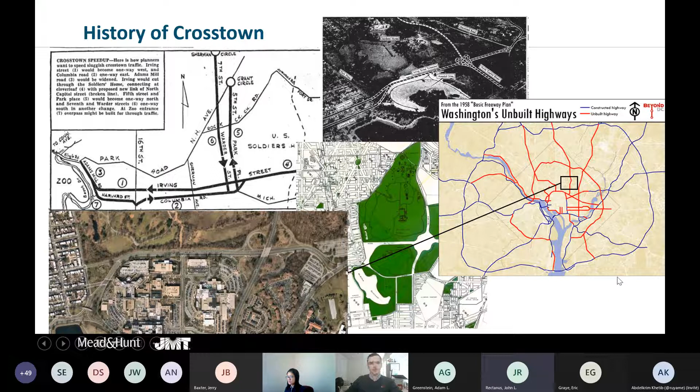So essentially you have this urban freeway dividing neighborhoods, separating people from services and from other people. And so this project basically seeks to address that by making it more of a multimodal corridor, safer for everyone, and to improve mobility in that area.

So to that end, DDOT and I believe RK&K did the 2016 Crosstown Multimodal Study, which basically identified some concepts for how can we put a cycle track on this existing urban freeway, and how can we make that safe and make it work for everyone. And so from that study came a 30% design, and that's where we took over from.

And I really just want to talk to you about a few specific areas of interest that kind of gave us a challenge in the design and that I think are kind of interesting here. And so first I want to start, well, sorry, I didn't realize I had a click there, but you can see apparently this was actually part of the bike plan in 1974. And so here we are in 2022. It was built about a year and a half ago. So it takes some time, but things are accelerating nowadays.

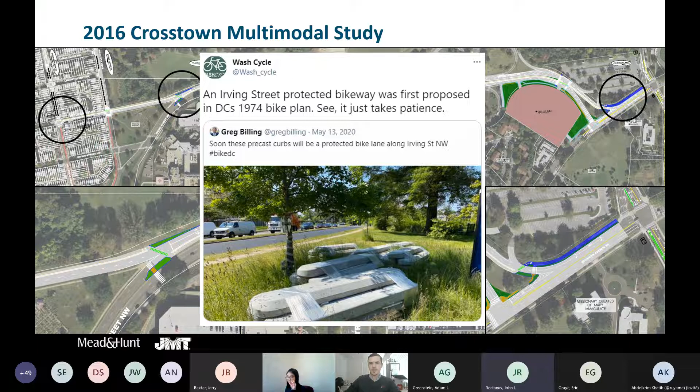So the first design challenge that I wanted to talk about is on the west end, which essentially today is the terminus of this cycle track at Warder Street and Kenyon Street. There are plans to eventually extend this further west through to 14th Street and beyond, but today this is where the cycle track ends, and that's where our design ends, and it will tie into the Warder Street cycle track, which will run northbound here.

And so the challenge was, because of this somewhat abrupt termination of the cycle track, in the original concept it was running along the north side, which was fine through here. The parking would be restricted and moved to the south side, and the south side parking would become peak restricted parking. However, on the receiving side, it would be the opposite. So the parking on the north would be peak restricted, parking on the south would be full time.

So we identified this problem, worked with DDOT, and kind of came to the conclusion that we needed to actually flip the cycle track to the south side so that the cycle track aligned with the full-time parking on the receiving side, and then the peak parking would be removed during the AM on both sides and the PM on both sides. So we would have lane continuity essentially.

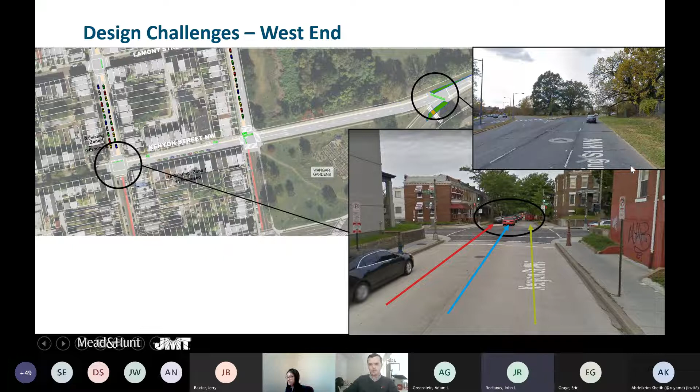So here's basically how the design turned out. And you can see again that the cycle track moved to the south side. And so we restricted a little bit of parking full time to allow the bikes to merge back into the traffic. But then during the peaks, we would have 2 full travel lanes. And again, as I mentioned, now we have a very, very short 2-way cycle track crossing across this new signal. And so the signal really only had to stop traffic crossing here and here, because we added this as a new signalized crosswalk. But the heavy through traffic going westbound here remained free flow.

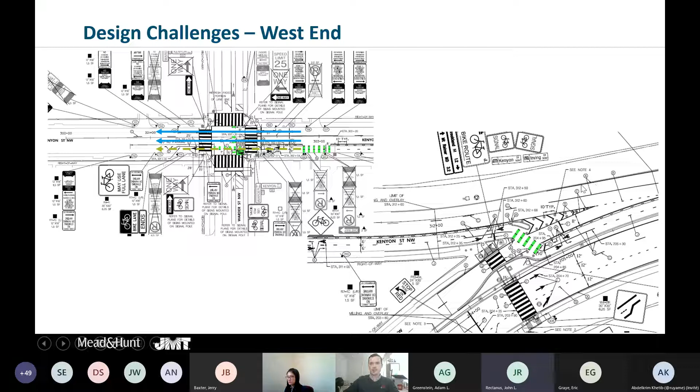So here's kind of how that turned out. And this is the short crossing signal that I was just pointing out. And then this is where the cycle track runs along the south side once it comes to Kenyon Street. So that's the finished product.

So the second design challenge that came up was at the intersection of First Street, which is the entrance to the hospital. And we have an extremely heavy left turn in the morning that goes into the hospital. The staff and everything comes in the morning via this route from the north and from the south. And so it had to stay a double left in order for this intersection to work. And what you can see is that on this approach, we have 2 through lanes and a right turn lane. And so basically, in order to keep 2 through lanes in both directions, a double left, add a 2-way cycle track and a buffer, the entire lane had to shift.

And the issue was that these drainage structures along this double left turn lane would have to be relocated. And that basically wasn't in the construction budget. As Jerry mentioned, these are kind of quick build projects, not trying to do a lot of civil design or drainage work, because that really pushes the costs up beyond what this contract can sustain.

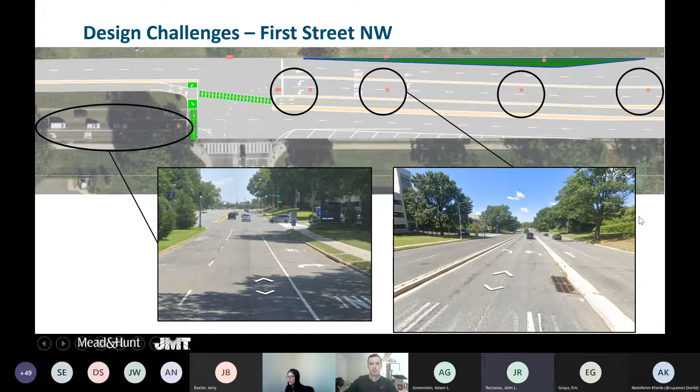So we went back and analyzed this and looked at the ways that we could adjust it, and it turned out that we could get away with converting this eastbound approach from 3 lanes, which it was in the previous condition, 2 throughs and a right, to a single through and a shared through right.

And that allowed us to push the cycle track to the south of the existing median and not have to touch any of those drainage structures. And essentially, that eliminates any issue we might have with the through traffic shifting and any conflicts that would create with the cycle track. And so you can see we had to do a little bit of median work here to put a signal pole out there. But other than that, we didn't have to touch any of these medians or drainage structures.

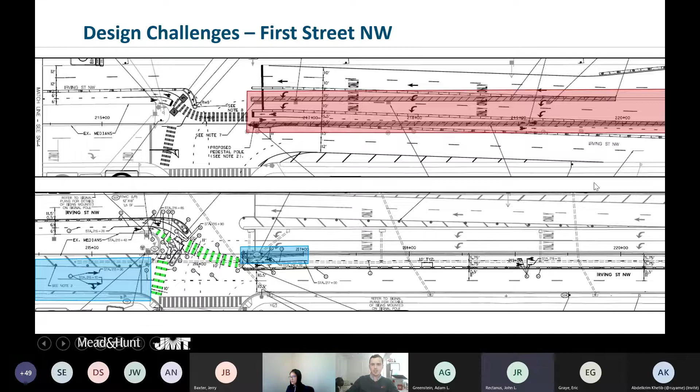And so you can see here, this is the intersection. That's the crossing for the bikes, and this is the existing median right there. So the cycle track just sits below that.

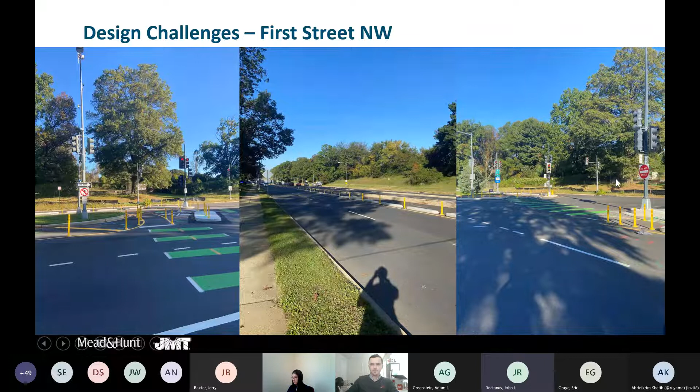So the next challenge that came up during the design was on the very east end, the eastern terminus of the cycle track, where the cycle track moves from an on-road facility to a shared use path facility. And originally during the design, this was just going to be a standard asphalt shared use path, but we very quickly realized that that would require us to impact these trees. We didn't want to have to dig down and impact the roots, and we also got similar feedback from DOEE and the Urban Forestry Division.

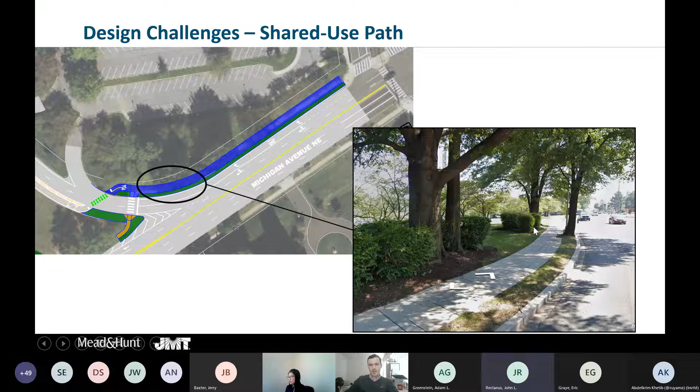And so what we ended up doing was a porous, permeable, flexible pavement path, which basically sits on top of the existing grade and made it so that we didn't have to impact the tree roots. And as you can kind of see here, it also meanders through the trees, so we didn't have to damage their roots or cut any of the bushes back. Because this path was widened, we ended up doing specific path lighting for this trail.

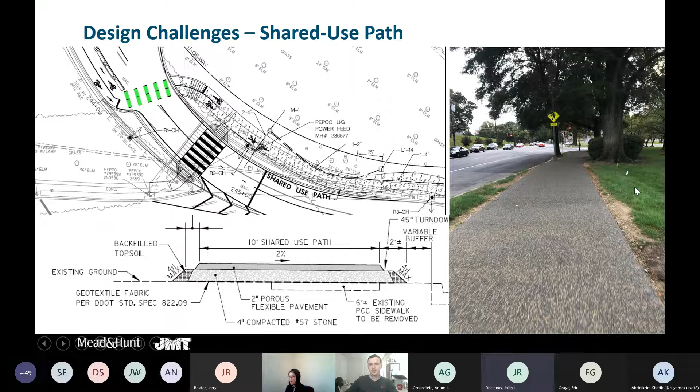So the next thing that I wanted to talk about was the repaving effort that happened kind of right in the middle of the project. So you can see before we came through, the pavement in most of this corridor was in pretty poor condition. And it turned out that if we did the repaving as part of this specific construction project, it would basically double the budget. And so DDOT worked with its existing repaving contracts and found out that this one was pretty much due on the schedule around the same time frame that the cycle track was going to come through.

And so what we ended up doing was developing an interim plan, because they needed to do the repaving a few months before we could actually start installing the cycle track facility. And so the interim signing and marking plan basically made it so that we could maintain the existing vehicle traffic operations, and then very simply come back when we were ready to start building the cycle track and place our blocks right along the third travel lane here. You can see these white dots and this white line, which was the travel lane during the interim condition, became the concrete cycle track buffer blocks.

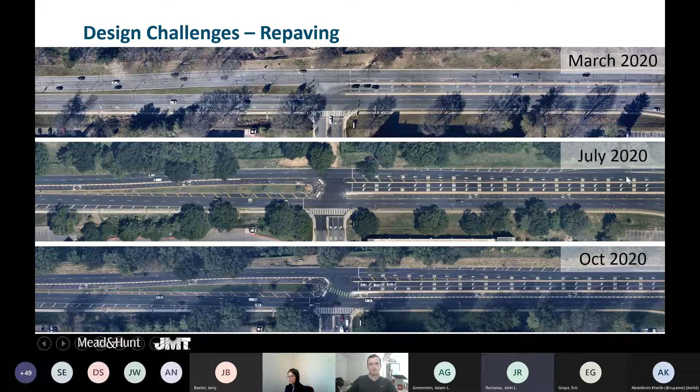But ultimately, all they had to do then is come in and stripe the yellow edge line and put the blocks down, and that allowed them to seamlessly transition from the temporary condition to the ultimate condition. And so that actually made this project possible from a cost perspective by getting the repaving done through their normal channels and coordinating that with our design. And so you can see here a few more examples of how that worked out with that yellow edge line, and then they were just able to again place those blocks right along that yellow edge line and install the flex posts and all that stuff.

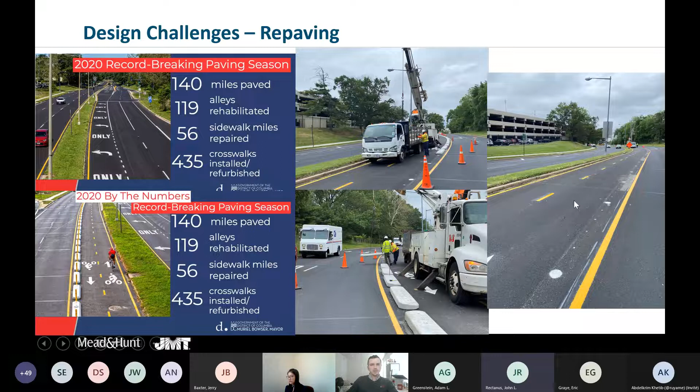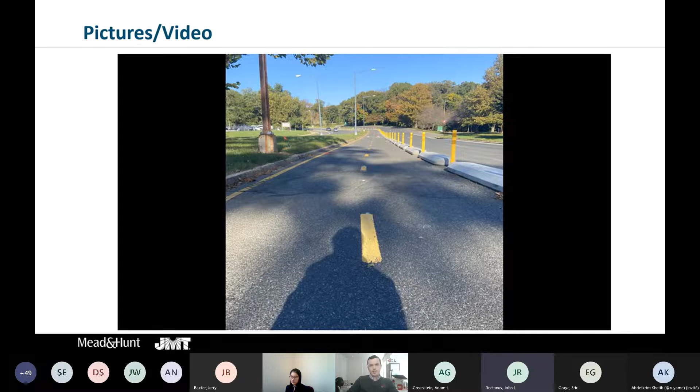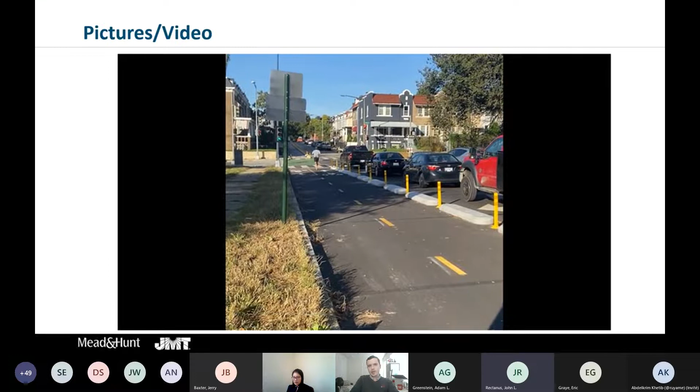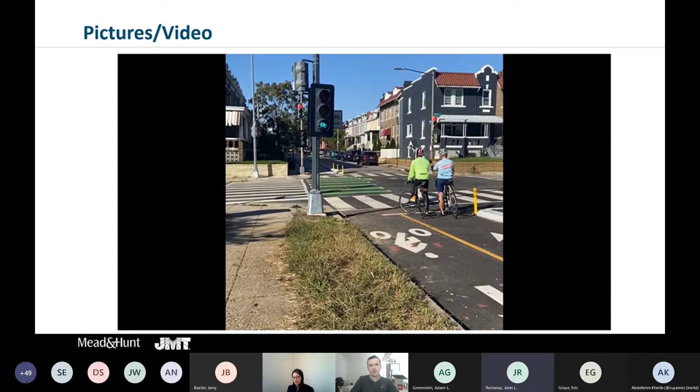So hopefully this works. This is some pictures and videos of the facility in action. Yeah, and you can see basically how people are able to very safely ride along with adjacent vehicles, but there's no conflicts. Each of these signalized intersections has bicycle signals, so all the bike phases are exclusive. No turning conflicts or anything like that. And we noticed also that because this area has very narrow sidewalks, people started using it for running and other mobility uses.

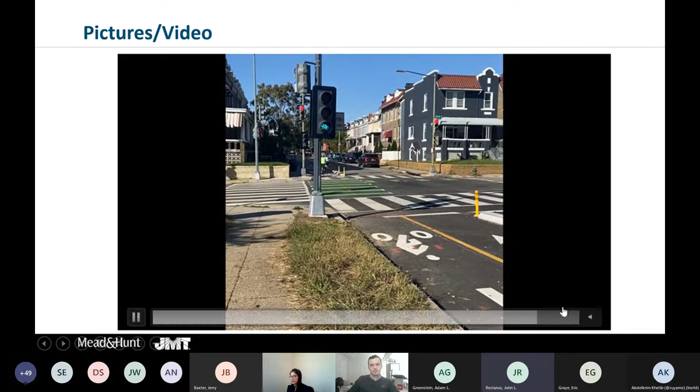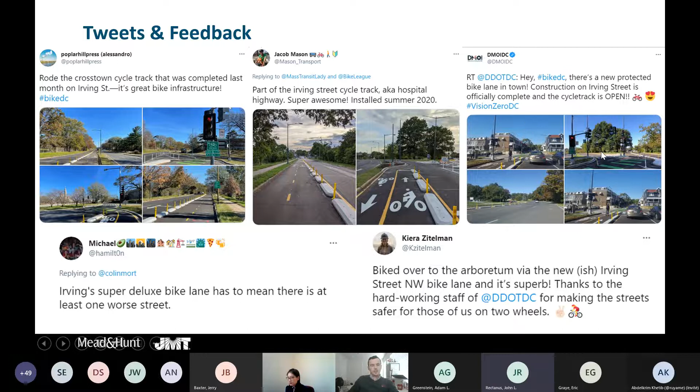So lastly, I just wanted to show some of the feedback that we got, and everyone that has been involved in this project from the study through to construction should be really proud of it. I think there's been a lot of great feedback, and I think it's really a great model for how to repurpose existing pavement into something that is more appropriate for our current context and our current mobility needs.

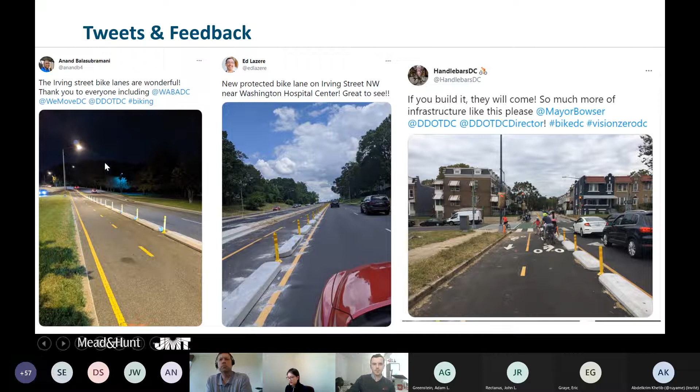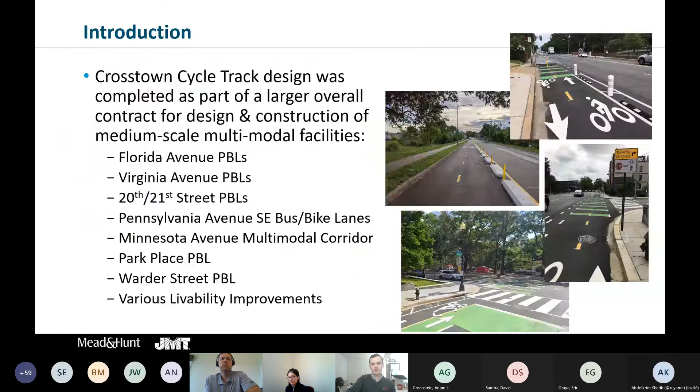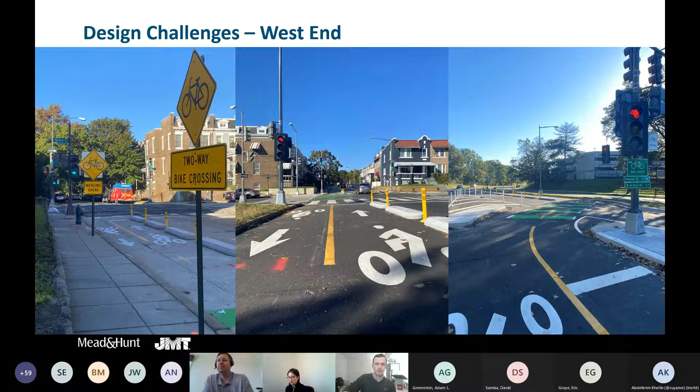Yeah, I know which one you're referring to. That was an installation mistake, I believe, that needs to be corrected. Where was that? There's one there too. In both pictures, the bicycle's doing something of a wheelie, which is not correct. The bicycle should be flat. So that's just an installation error. So the signal modifications, there were 5 traffic signal modifications.

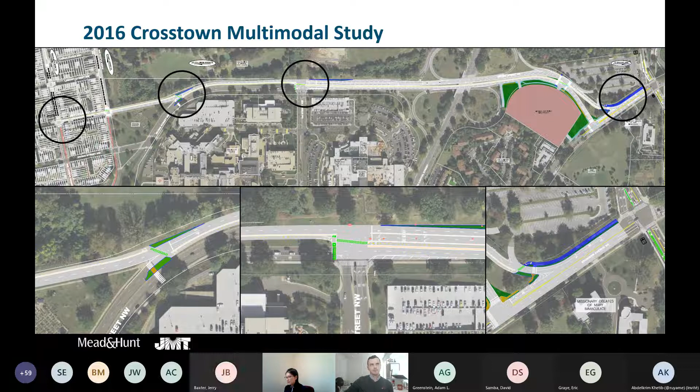I would like to introduce Dave Samba. He is a transportation engineer and community planner with 11 years of professional experience. Dave's a double graduate from the University of Virginia and another university. I'm sorry, I think my bio missed some words here. And he currently leads mobility, safety, and parking projects at Kimley-Horn.

Dave's comprehensive skill set includes traffic operations, multimodal transportation planning and design, benefit cost analysis, and grant writing, private sector traffic studies, private and public parking evaluations, and complete street evaluations. Dave is passionate about creating safe, accessible, and equitable mobility choices for all. Dave will be presenting the Core of Rosslyn transportation study and the implementation plan. Dave, it's your time now.

Dave, you are muted. Thank you for that introduction. I'm going to get my presentation going, and I'll share my screen as well. Let's see. All right, can you confirm you're seeing the presentation? I think it's coming through. Yeah, I can see it. Great, perfect. All right, well, good afternoon.

Thank you all for the opportunity to present the Core of Rosslyn transportation study. Lily, thank you for that introduction. So I am David Samba. I'm a mobility engineer and community planner at Kimley-Horn. I'm in our Reston, Virginia office. And I was part of this project, which was really delivered in partnership with Arlington County. So on that point, I would be remiss if I did not name a few members of the county project team who led this initiative through a really excellent planning and public engagement process. So Dan Neighbors, Christine Baker, Kelly Cornell, among many others that were involved.

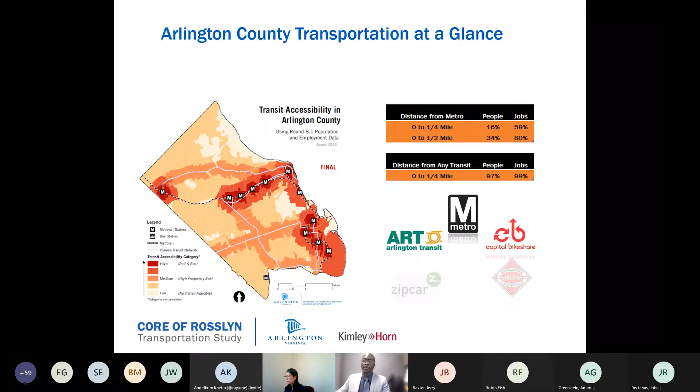Certainly there are a number of multimodal options to get to the county. Metrorail, 11 Metrorail stations, local bus service, 17 ART bus routes, I believe. Capital Bikeshare, Zipcar, rail, VRE, many options. And of course, what we always want to make sure we pay attention to is those active transportation modes that are at most risk. So that's the bicycle and pedestrians. So how do we manage all these interactions? I think that was a major part of this study. Some other context on Arlington County, the county has 5,700 on-street parking spaces and over 100,000 off-street parking spaces, and the majority of those are privately managed or maintained.

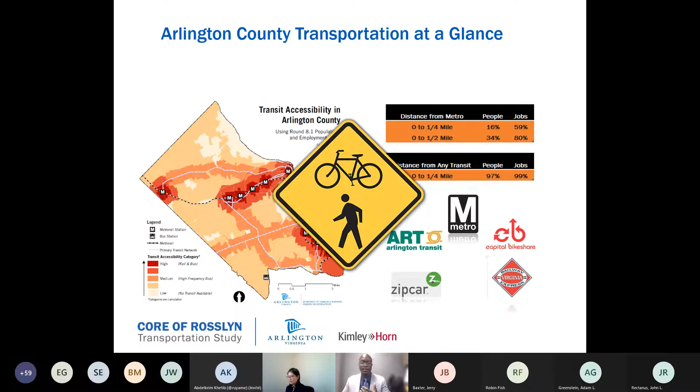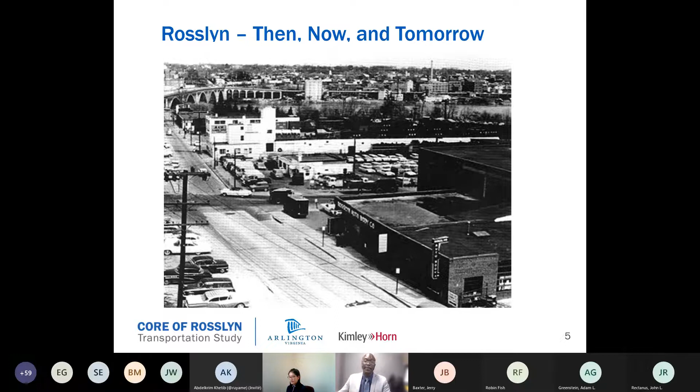So drilling down to Rosslyn, then and now, I'll show you a little bit of some imagery of Rosslyn past as we get to Rosslyn present. So Rosslyn today is home to a dynamic and interconnected urban transportation system. It offers those who live and work and play in the neighborhoods really a wide range of choices for how they travel and where they can go through a diverse range of transportation modes. This older image may not lead you to think it is a walkable neighborhood, and it actually has the highest foot traffic volumes in all of Arlington County.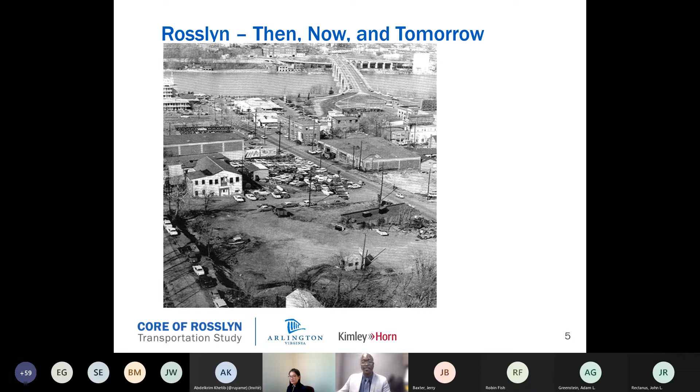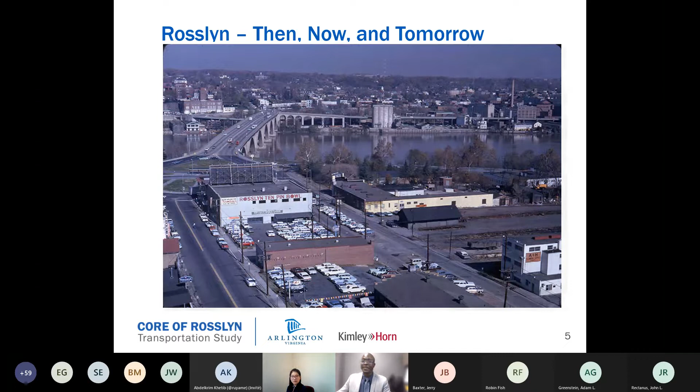So as we continue to move through, this is an image from the 1960s. Development is starting to happen, obviously. Still from the 1960s, but we have a little better color cameras, and then we see Rosslyn today. So about 13,000 population, more than 25,000 people work in Rosslyn, depending on the statistics you look at.

And just to provide some context to what I just said, there are 664 metered parking spaces, so about 12% of the county's parking spaces are in Rosslyn, and about 20,000 off-street spaces. So again, 20% of the off-street spaces. So Rosslyn is interesting. It has some interesting and prominent transportation features. This is the Fort Myer Drive tunnel that's currently there. You can see a sky bridge, I believe, in the background there.

And it is on the nexus of a future transportation change as we are grappling with and come to terms with that people are changing the way they want to travel, right? It's more about that human scale, pedestrian scale experience as opposed to this auto-centric experience that Rosslyn was built to satisfy. So how do we incorporate that into our study?

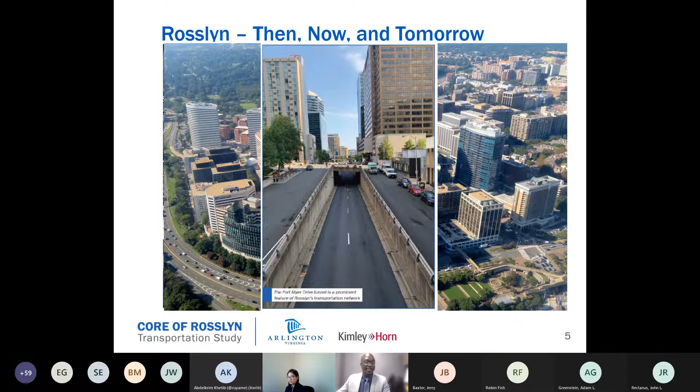All right, I'll just give you a little more context. I really like these images just to give you context for how active Rosslyn is, looking through parking meter performance. So this is 10 a.m., 12 p.m., so lunchtime. Red means there's more parking activity, at 7 p.m. So Rosslyn is pretty busy. People are there to enjoy themselves, to work, to live. And so planning this community, and planning it well to make sure it's functional for all those uses, is critical.

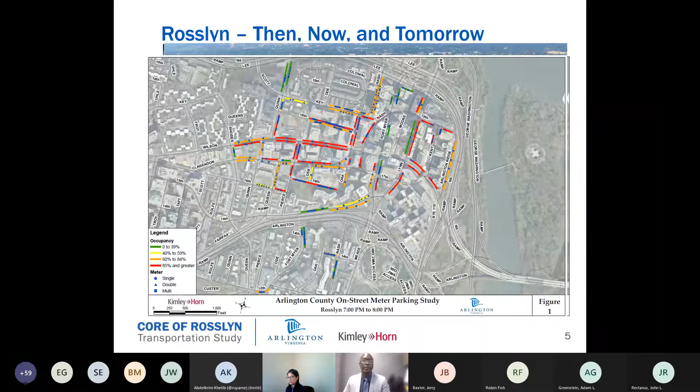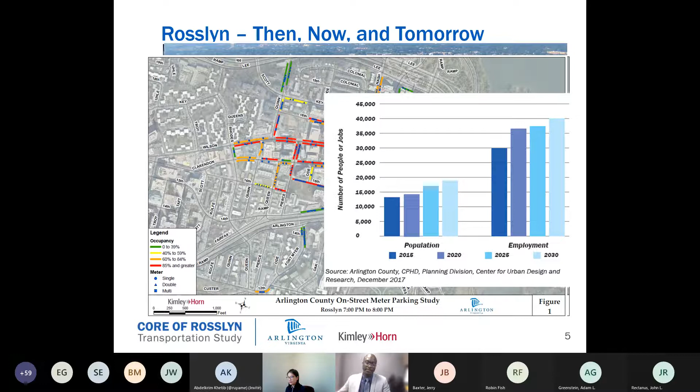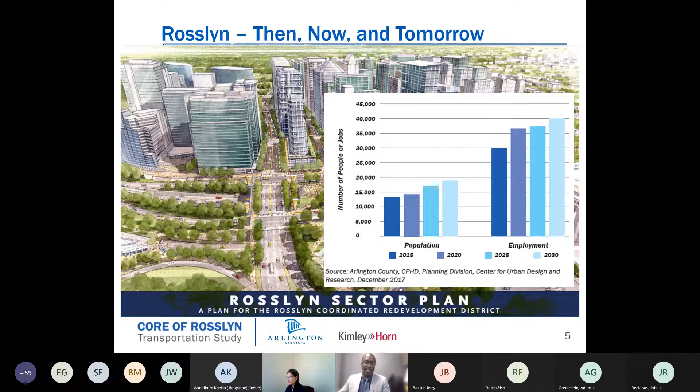That's a population statistic. So you can see how Rosslyn is projected to grow, both in population and employment. And how this all leads to, of course, the Rosslyn Sector Plan. So how do we start to envision what tomorrow will be? In 2015, the county approved the Rosslyn Sector Plan, through a process called Realize Rosslyn. It was an update to a 1992 plan. It served as a 25-year outlook to guide future public and private investment and provide recommendations for parks and transportation-related elements.

In that sector plan, they identified that Rosslyn needed a better urban design framework to become a more attractive and functional place. They also wanted a refined multimodal transportation system, and a more cohesive and functional park and open space network. You'll see what I'm talking about with parks and open space in a second. Realize Rosslyn and the Rosslyn Sector Plan was a very successful effort, but ultimately it was not a regulatory document. It presented an illustrative concept. It recommended some goals, set a vision, and established guidelines and policies.

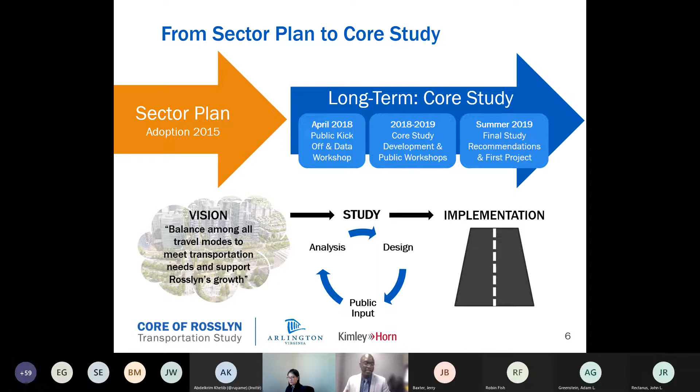But how do you get from a vision to projects and implementation? Well, you actually need to do another study, and that's what the Core of Rosslyn study was. The Core of Rosslyn Transportation and Implementation Study was an opportunity to take the great ideas of the sector plan and analyze them, design them in the public realm, share them with the public, have that idea exchange, that process of discovery, to lead to real projects that could be implemented in Rosslyn, that were vetted with the public and spoke to the current needs of today.

So I already hit on the goals of the project, but I'll just say a couple other high-level things. We were trying to evaluate multimodal design concepts and measure how each concept achieved the sector plan's goals. We were heavily interested in engaging the public and other stakeholders. And ultimately, we were trying to adopt a 2030 preferred alternative composed of individual projects that can move through the county's design process and also their CIP processes.

We were also really interested in sequencing those projects. So how do we create a fluid network transition from where we were when we started the project, in 2018, 2019, to where we want to be in 2030? And a little bit of visioning is always important. We wanted to identify projects that went beyond 2030 to continue to realize the Rosslyn Sector Plan.

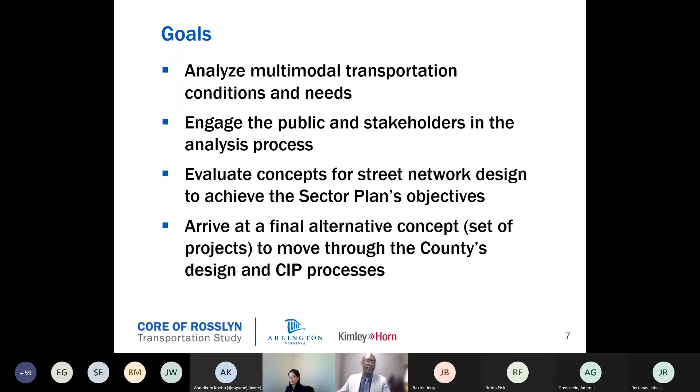All right, so just to give you a little timeline graphic. Again, the sector plan was adopted in 2015. The county started to do some short-term activities, engagement with the community in 2017, some tactical urbanism projects, and I'll highlight that and come back to that in a second. And then we kicked off in earnest the Realize Rosslyn study in 2017 to do all our analysis, to engage the public, and then to really think through what implementation will be.

And I highlight tactical urbanism because I think this was a really important and related aspect of our study, which was even though as we were analyzing all these different future alternatives for 10 years out, for 15 years out, the county recognized that it was important to speak to what people needed in Rosslyn today.

So through tactical urbanism deployments, I'm talking about a little bit of lane restriping, planters in the roadway, rethinking parking and curb space, and making it a little more pedestrian accessible and pedestrian friendly. The county was able to do some relatively low cost and quick implementation projects to, one, set the stage for some of these future changes, but then two, specifically to address needed operational and safety needs.

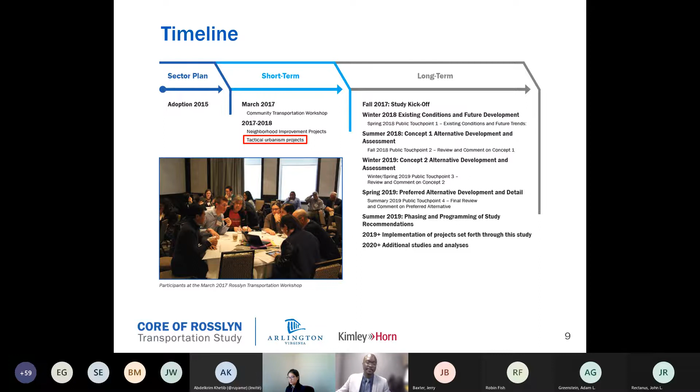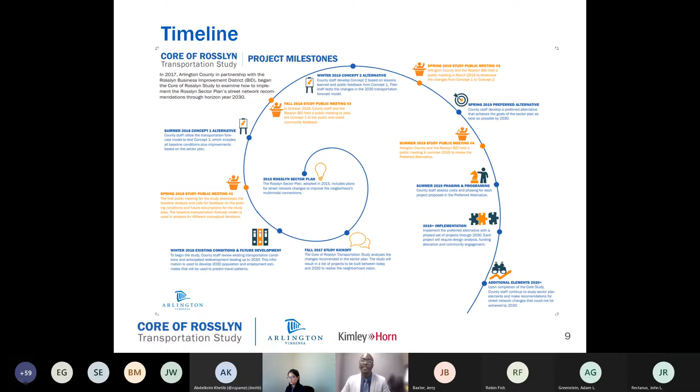And I'm a very graphic person, so here's just another timeline of that. The only thing I'll point out on this slide is that we had 4 different and very successful public engagement meetings, and really that helped to refine the process.

So what did we focus on in the Core of Rosslyn study? The first thing is that it was centered around implementation. Everything that we did was to get the county a list of projects that could be designed and implemented by around 2030. So we really tried to keep a very realistic eye on that end goal. And it was a multimodal study. We looked at how every single mode was influenced or impacted by the different design alternatives.

We always wanted to make sure it aligned with the sector plan goals, but we also tried to stretch those things in the sense of what else can we be doing to increase the accessibility of bus and rail transit? How can we change and enhance the pedestrian experience and comfort? What can we suggest that would increase the connectivity of Rosslyn's bicycle facilities to the county's larger network? These were some of the things that we were thinking of.

And even though I'm a transportation engineer and planner, we were also trying to think beyond just transportation; we were thinking about urban design. How is what we're suggesting going to incorporate elements of sustainability, green space, pervious areas? How's it going to enhance the streetscape and placemaking elements of Rosslyn as a neighborhood? These were just broader things that were embedded in our analysis.

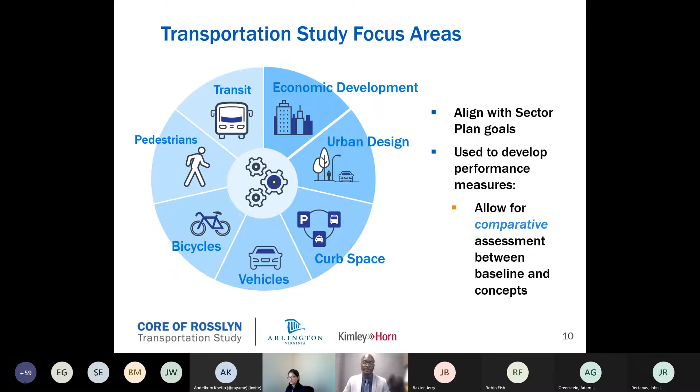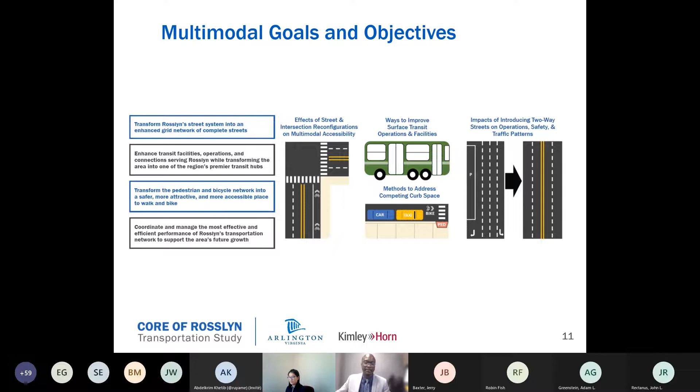So again, here's some of our goals and objectives. Again, we tried to take a very multimodal focus, wanted to understand how we're affecting all the ways people are currently traveling and how they might travel in the future if we could raise that level of service for them. So that's the background context. A little bit more about Rosslyn to kind of show what we're working with. If you know where Rosslyn's situated, some common destinations from Rosslyn, you're heading into DC or heading out west to Greater Fairfax, the Tysons Corner area. You're certainly using the Rosslyn-Ballston corridor along I-66.

Sometimes you'll meet a community and they might be resistant to changes that might lower the vehicular level of service to increase the pedestrian or the transit comfort. But this was a community that was very receptive to that as we were working through the process.

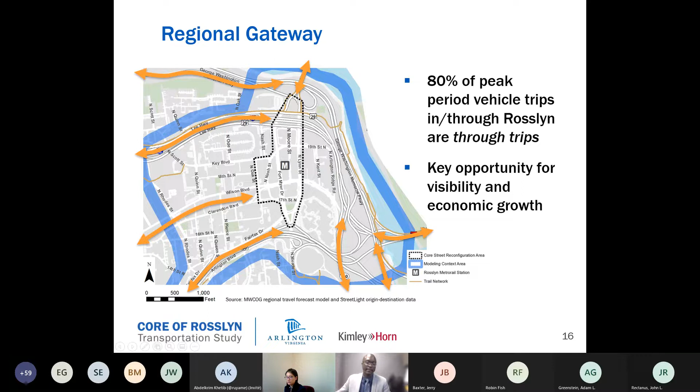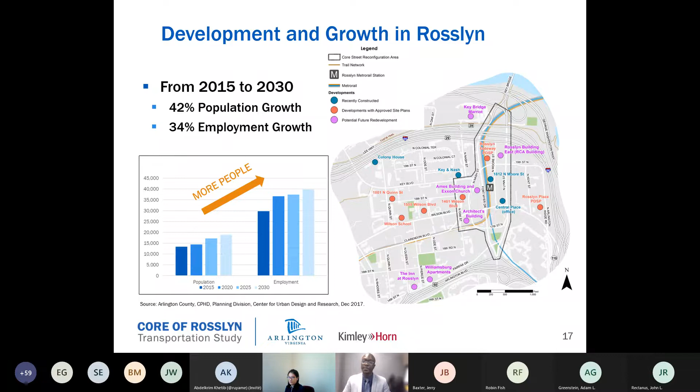And then I kind of already alluded to this earlier, just Rosslyn is poised for some significant development. And so this was a very critical point to take a step back and recognize we need to implement that vision now, sooner rather than later, so that we are prepared and ready to absorb the future population, the future employment, and really make Rosslyn a place that is active and vibrant.

All right, so again, a little more background for you. So now we can talk about the data and methodology, the nerdy stuff, I suppose. So what was our key data? How do we do this study? I mean, it's everything you would think it would be. The existing traffic counts. We used some StreetLight big data to really understand regional trips and trends. We took some previous parking data that we'd had from that meter parking study and other studies to develop a really good existing conditions understanding.

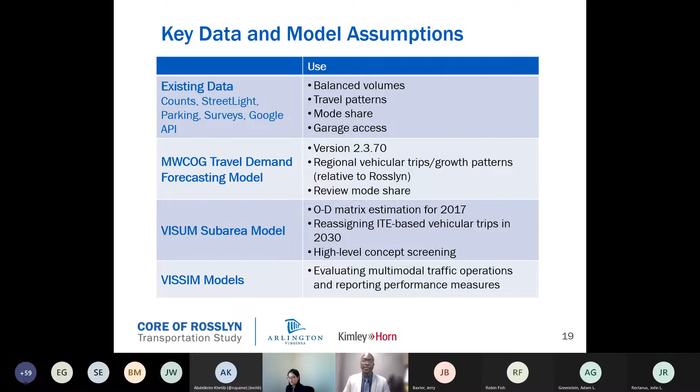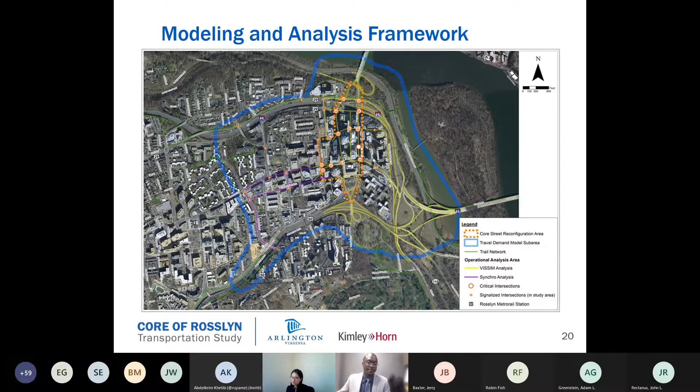In terms of some other things we did, of course, field observation, travel time runs, and then we used our typical modeling processes, the MWCOG regional model, a sub-area model, and a VISSIM model, which I'll get into in a little bit. So just to give you a sense of what our study area was, quite large. So we had in that blue line, that's the entire travel demand network that we studied. But then we kind of broke it to smaller and smaller chunks that were more bite-sized and were able to really accommodate.

So again, we had a macroscopic analysis. So that's what we use the MWCOG model for. We really want to understand at a regional level, how are trips occurring? What's the external trips into Rosslyn, the internal trips out of Rosslyn, and of course the internal to internal trips as well. So that helped us really kind of grapple with, okay, how does Rosslyn relate to the region? From there, we took a step further, and of course, when we're using the regional model, it's not as refined, it's not as detailed to the study area. So we use the VISUM model to replicate kind of sub-area travel patterns. And I'll show a figure in a second that shows that a little more clearly.

And then once we were able to really replicate that sub-area trips, we drilled down one further level into a microscopic evaluation using a VISSIM model, that's where we're going to do our detailed study area network analysis. And that's actually where we're able to have a little better understanding of how some of the changes we're recommending from a multimodal perspective are impacting vehicles and vice versa.

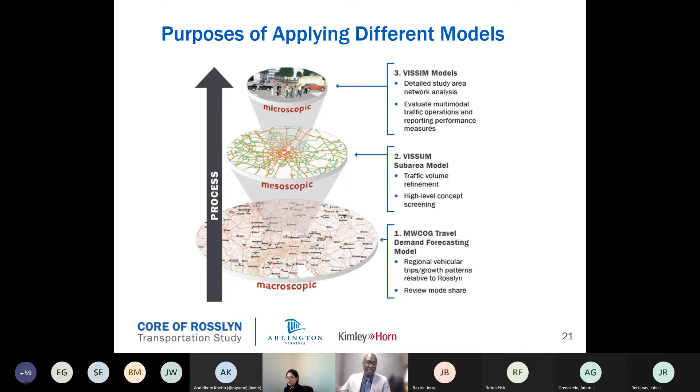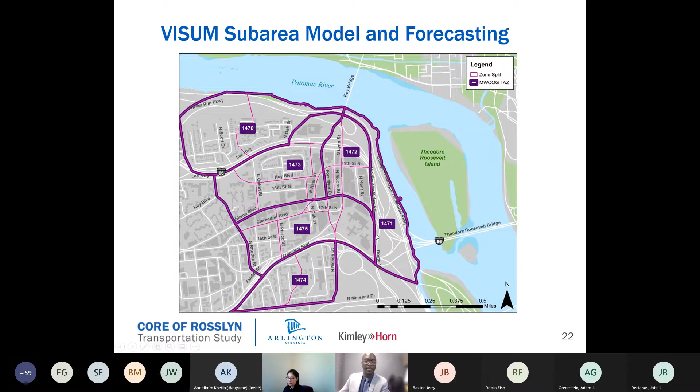So again, just to give you a sense of our study area and our forecasting. Actually, I'll go to the next slide on this one. So the purple lines are the MWCOG traffic analysis zones. The pink lines are the sub-area splits that we use for our VISUM. So again, we tried to really drill down there, so we were able to get a little bit better granularity as we were developing our modeling network.

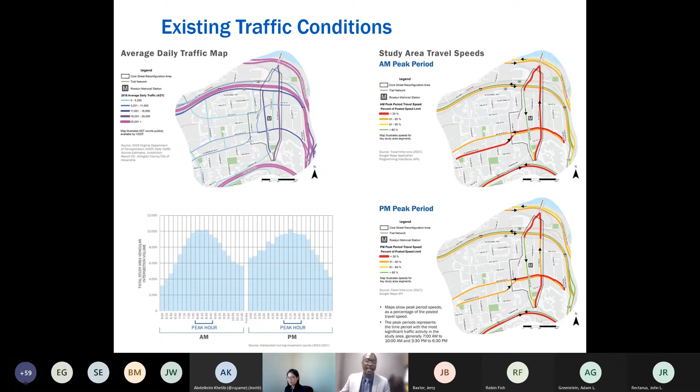All right, so did all this, we set up all this process. What was the analysis? Well, again, it's typical analysis you would think. We looked at existing traffic conditions. We mapped traffic volumes during the peak hour. We looked at level of service and delay and congestion and queuing. And really, we were trying to understand what the existing conditions were, where congestion exists, and how it propagates through the network, and where the kind of relief valves might be.

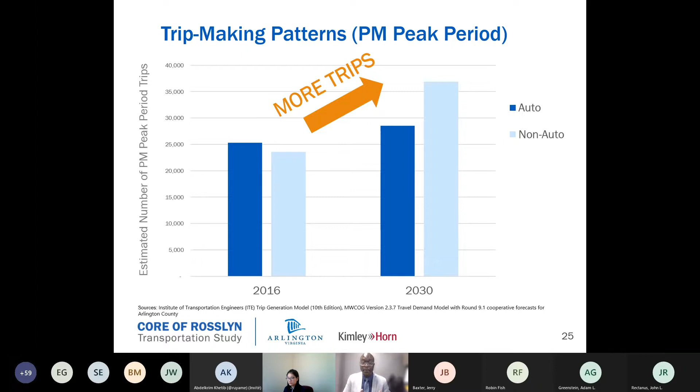We looked a little bit into the future to understand, again, using the MWCOG regional forecast and some specific land use inputs that the county provided. We wanted to understand how is trip making going to be different in the future? If we're planning for projects in 2030, how responsive would those projects be to this 1% per year growth in auto trips and that 4% per year growth in non-auto trips?

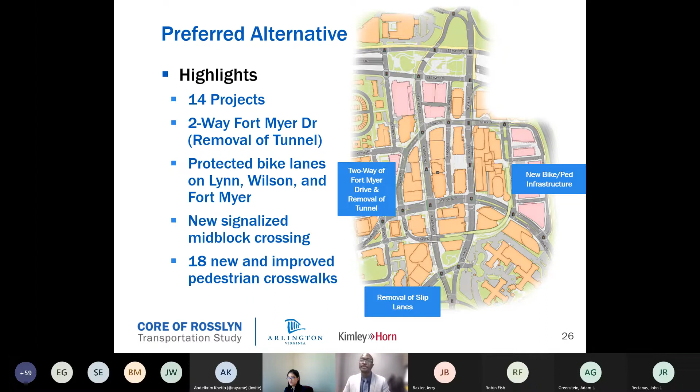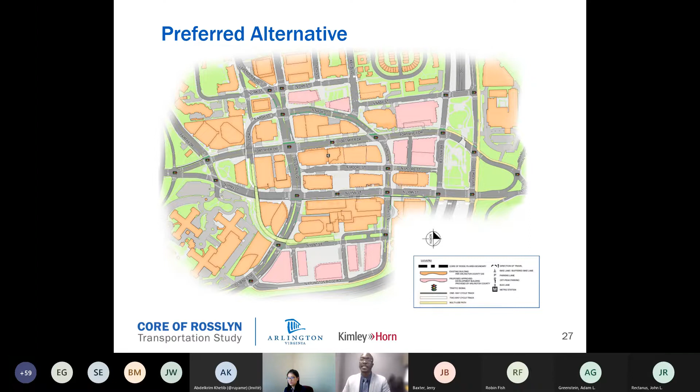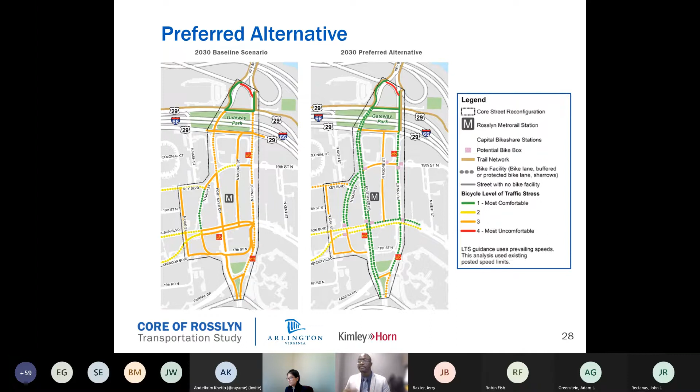Not to only focus on vehicles, I wanted to just drill down on bicycles for a second here. Looking at the baseline compared to the preferred alternative, you can't really tell from the numbers, but if you look at the increase in the amount of green shown on the right, we were able to show that there'd be value in increasing the percentage of bicycle level of traffic stress 1 streets from currently about 12% all the way up to 61%. So think about that. That is an increase of, I think it was 1.7 miles of improved connections in Rosslyn for people that are biking, and to an extent, people that are walking too.

And so we came up with this comparative assessment where we identified measures of effectiveness per mode that were specific to that mode, and used that as a benchmark of how well is this mode doing in the preferred alternative? Are we making a positive change, a negative change, or keeping it approximately the same? And that allowed us to have a more nuanced conversation with the community so they could see the value of some of the changes that we might recommend.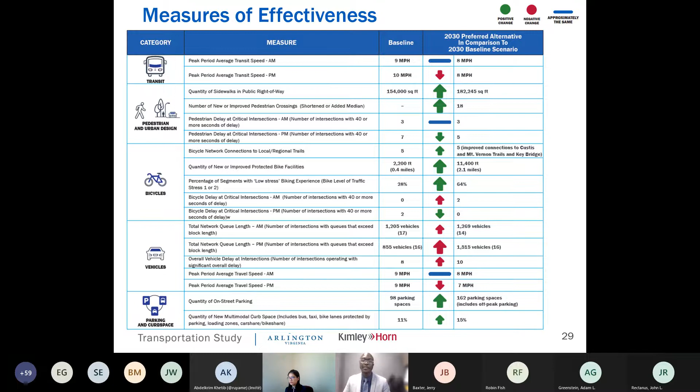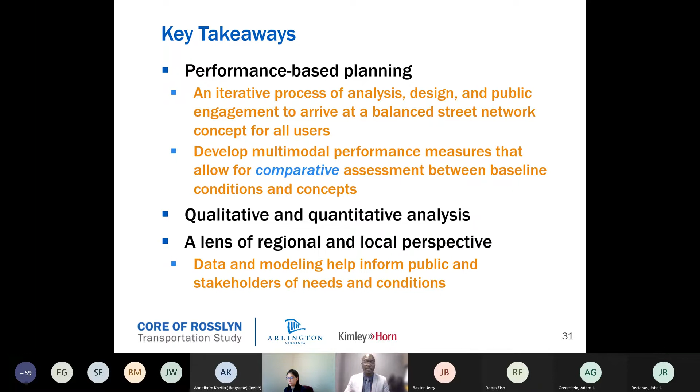All right, so key takeaways, implementation, next steps. This process was performance-based planning, right? We iterated multiple times on design concepts to come up with a balanced street network. And that comparative assessment led to a really good conversation with the community and a screening of those concepts to make sure that we were hitting not just one vision of Realize Rosslyn, but all the visions of Realize Rosslyn. And we also took a very nuanced approach to looking at how the changes affected both the region by using the MWCOG model, but also the very specific local needs using the Vissim model and also connecting with stakeholders.

On implementation, as I mentioned, we hit 14 projects. One of the things that was very important was phasing and responsibility. So we thought through, again, we want to have a fluid transition into 2030. So how do we accommodate all these different projects at the same time? How do we help the county identify what the funding mechanism will be?

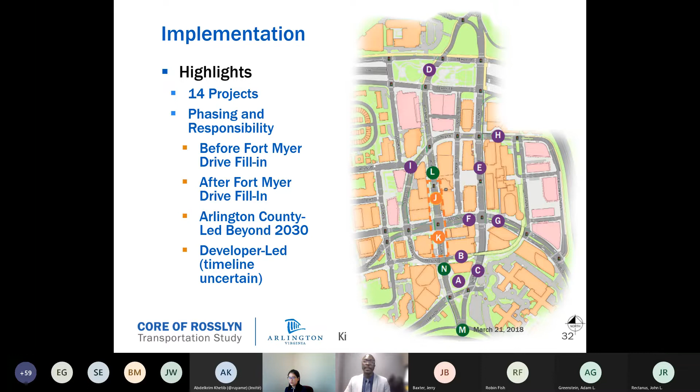So we prepared an opinion of probable costs and a sequencing of each of these. We thought through it in terms of, well, what do you do before you fill in Fort Myer Drive? So there's a certain amount of project you could do then. What do you do after you fill in Fort Myer Drive? A certain amount of project you can do there. And then that gets you to 2030. What else can the county do after 2030?

And recognizing that the Rosslyn BID was a key stakeholder, what are things that might be developer-led? They may not have a certain timeline, but they're no less important. So what are developer-led initiatives that are really going to enhance the Rosslyn grid network?

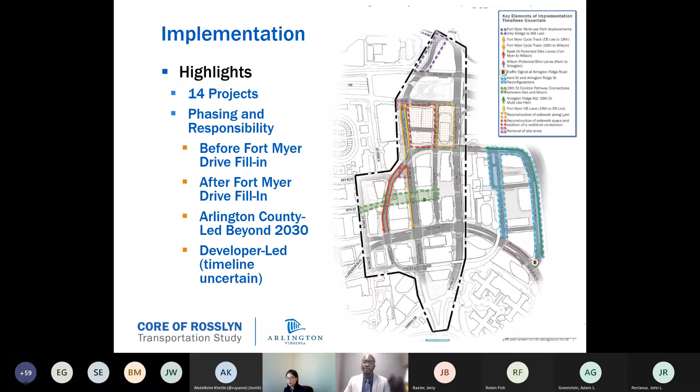And now, with my last couple minutes here, I'm just going to drill down into a couple of the implementation projects. So again, Fort Myer Drive, the tunnel conversion is a critical one, and we talked a little bit about that. Bringing this tunnel to grade and making sure that this is now a new pedestrian path across Fort Myer Drive.

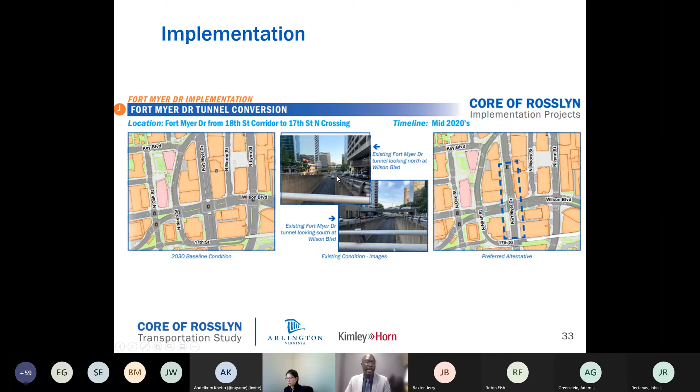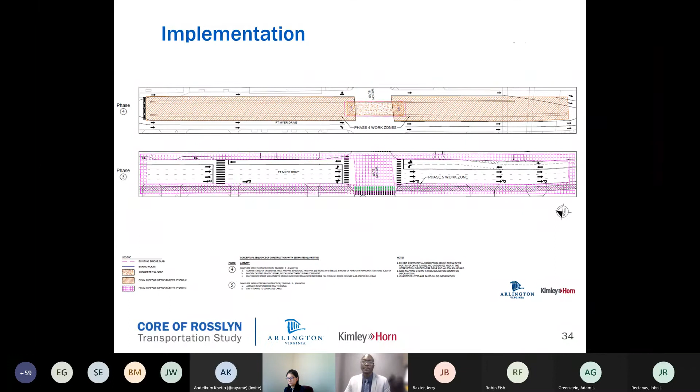And just to show you, we also went through a very detailed sequencing process of, well, what does it look like? How do you actually do it? How would it work in actuality? What is the timeline to bring this road to grade? The rough sequencing that we provided for the county. And then this is essentially what the new cross section would look like. Again, still a wide road, but now it's a little more pedestrian accessible.

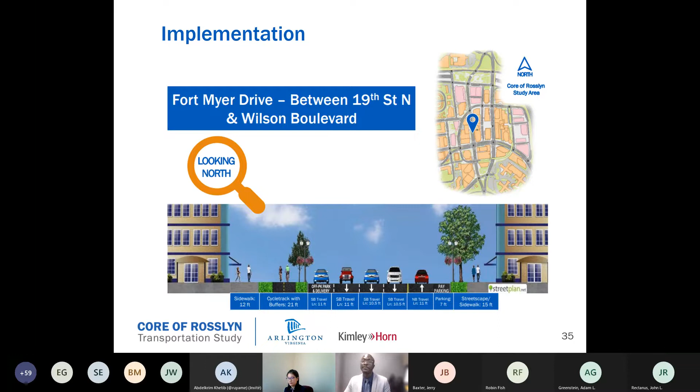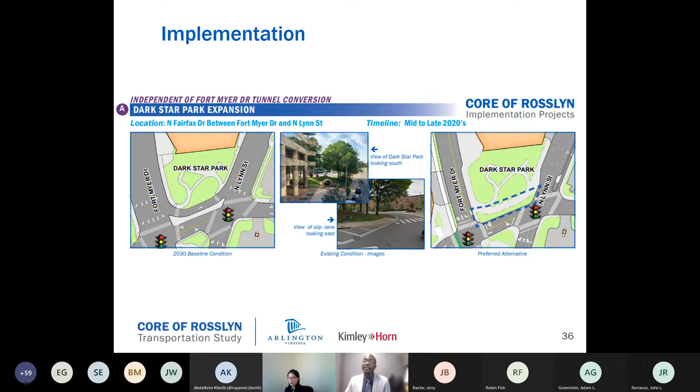So what's next? The Core Rosslyn Transportation Study, and I got this quote earlier today from the project manager, is seen as the plan standard in Arlington County. It was an effort led by a multidisciplinary team of engineers, planners, and landscape architects, and it used a combination of modeling tools, both high level and microscopic, to really analyze and interpret what a future multimodal street network could look like.

It also provided a very real and tangible sequence of events, opinion of probable cost, and really the tools that the county needed to get these projects put into the CIP, and also to be awarded $12 million in NVTA funding. So when I think about what's next, it's a continuation of that. It is seeking more funding from our local and regional partners to advance the rest of these projects. It is programming the rest of the projects into the CIP, and it's also taking advantage of some of the new things coming up from the Jobs and Infrastructure Act.

We know that act is supporting 25 competitive grant funding opportunities. I can think of one in particular that would make a lot of sense for Rosslyn, which is the Safe Streets and Roads for All program. It's $5 billion targeted exclusively for local governments to support Vision Zero, complete streets, things that are going to reduce crashes and fatalities and enhance the comfort for cyclists and pedestrians. So if you think again about the effort we did to design these projects for Rosslyn, a program like that makes the most sense.